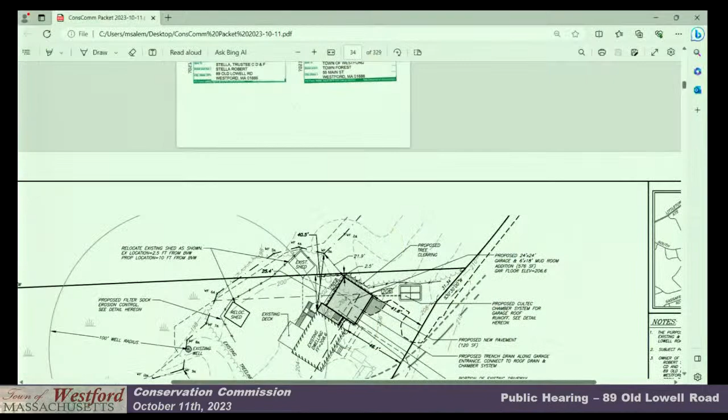The house currently does not have a garage. So what we are trying to do is put on a garage addition, I believe, on the south side of the house. You can see it on the plan there, and I'll kind of go up and point.

So this is the existing single-family house here. This is Old Lowell Road right here. Existing driveway paved coming in. There's kind of a crushed stone parking area in the back.

This property extends like 500 feet back from the road. It's a very long, narrow lot. The back 75% or so of the lot is all wetland and floodplain. We do show the bordering vegetated wetland here, and the floodplain line kind of follows right along that. So the 100-foot buffer pretty much takes up almost all of the property except for this very front corner right here.

We also have a shed right now that is actually just off the property, encroaching on the neighbor's property. So as part of that, we are going to move the shed from that property onto the subject property and meet the zoning setbacks. The way I've tried to do this is to kind of make it as net zero or as net benefit as possible.

So as I mentioned, there is a compacted stone parking area back there. We're going to take that out. We're taking out a little bit of the driveway to put the garage as well. So when you put in the garage, you take away some of that existing stone pavement area, you wind up with an increase of about 100 square feet of impervious, which I don't think is a lot.

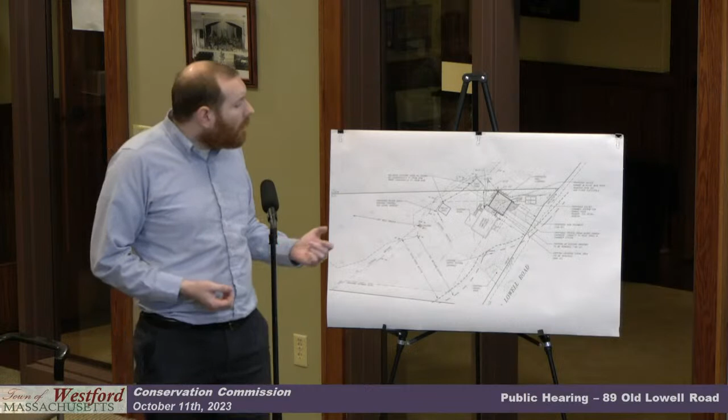But the other benefit that we're trying to do is to take this existing driveway and the addition and put that into a trench drain, into gutters, and put it into an underground recharge system. So not only are you barely increasing the impervious area, you're taking a lot of the impervious area that's already there and putting it into an infiltration system instead of having it run off into the wetland. So we've tried to make this as much of a net benefit as possible from a lot coverage point of view.

The corner of the proposed garage would be about 22 feet away from the bordering vegetated wetland. Currently, the house is about 40. The existing shed is about 3 feet away, and that crushed stone area that we're taking out is about 22 feet, so it's 22 feet for the crushed stone and 22 feet for the new garage. It's pretty similar.

So that's kind of the gist. We are going to take out, I think, about 250 square feet worth of trees for that garage addition as well. Happy to answer any questions, but that's the gist.

Jim, I have a question from Matt. Do you recall around Nab Lake how close we allowed the shed? There was a shed that had to be moved, remember? It was built too close to the lake. I think it was moved to 30 feet.

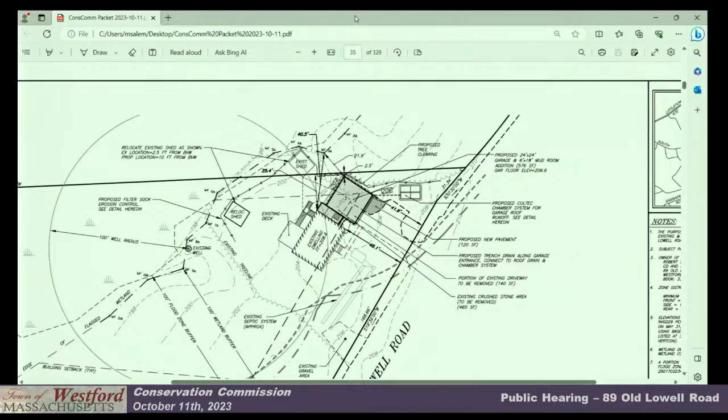Matt's pointing to it with his pointer. It's right here. I envision that they put that there to get it as far away from the wetland as possible. So if you were to build the garage here, you'd have to build the driveway over the septic system, possibly move the septic system depending on where the garage ends up. You might have to slide it further back, you might have to move the septic to get it to fit. So we didn't really want to disturb that whole septic system and all that over there.

How much can you shift it forward? Yeah, that's an idea, just how much can you bring it forward to pull it away from the wetland. It may not be exactly in line, but I'm trying to accommodate you here, seeing if you could just move it up somewhat.

The only issue is, the existing house right now is about 46 feet back from the front property line. The front setback in the zone is 50, so right now the house is technically pre-existing, non-conforming, less than what's allowed. We would be trying to get it to go to 41. So by putting that garage in, we're trying to strike a balance between getting it too close to the front property line and getting it too close to the wetland. That's kind of what we're trying to do.

But I guess what we're trying to tell you is, I don't know if we've allowed anything built in addition like this that close to the wetland. So I'm trying to find a way to keep it away from that, and you're saying you're trying to strike a balance. I don't know what to say, other than, I wouldn't be for this because it's too close.

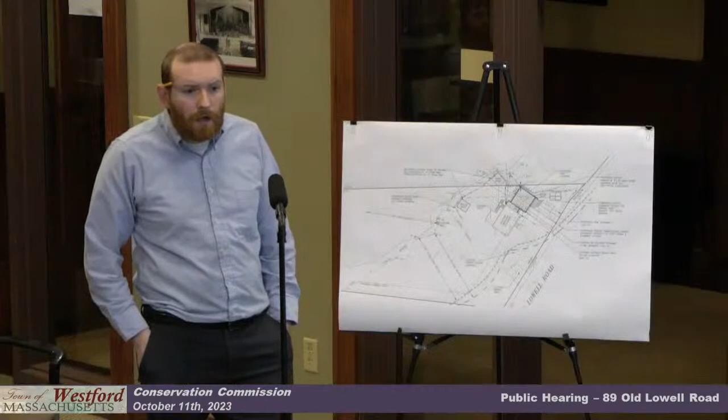So is the crushed stone that you're talking about removing, that's there in place today, is that pervious or impervious? I would consider that, everything is slightly pervious, but I would typically consider that closer to impervious than pervious. It's very well compacted, it supports the weight of a car. It's not asphalt though, we would consider it impervious. Okay.

The other thing I will say is, if cars are parking there currently - not a structure, agreed, but just for the sake of continuing the conversation, if cars are parked there, anything that leaks out of the cars is going right off. Typically we wouldn't allow a sonotube to be installed that close to the wetland, never mind a structure. So that's why we'd have to say no.

Do you know when the house was built? How old is this, roughly? 1984.

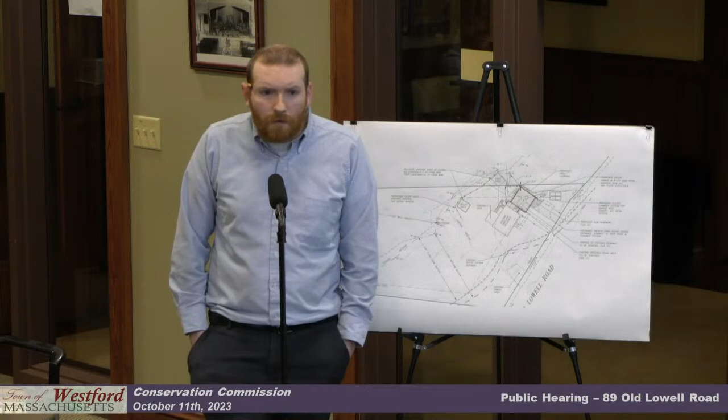I guess I'm looking for other alternatives. I'd ask what the rest of the commissioners think, and if you feel the same way, we can try going to the zoning board and try getting a little bit closer to the front with that garage, moving it closer to the front. You'd also need the zoning board to help with their side variance too, right? Instead of being 2 or 2.5 feet, that's gonna increase for them, which they'd prefer.

Yeah, because what we approve here becomes the standard for other projects, whether they have the same hardships or not. Others will be seeking the same relief.

So you're generally looking for 30 feet if possible, at least, the more the better. That's generally what we've approved, 30 feet - that's the no-disturb buffer. The no-structure is 55 for a house, in a previously disturbed area.

No, but let's see what we can do. I'm trying to understand and give them some direction. I'm not trying to say no. Just, well, with decks and things like that, that's where stuff as close as 30 feet has been allowed - decks or patios, things like that. But yes, this is definitely going to be different.

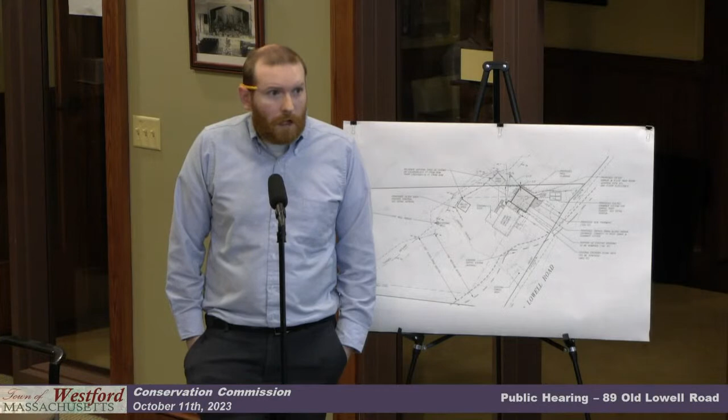I know where we've done that, where we've shrunken the garage to fit a lot and still get the setback. So I see this as being somewhat equivalent. And the same with the shed - from 10 feet, that should be 30 feet too. Yeah, we were trying to keep that away from the house. Obviously nobody wants a shed right up against the house, but I'll see if we could find a spot that's a little bit further away.

Also, with where you said there were trees that are being taken down for the construction of the garage - I'm trying to see where the 100-foot buffer is. Here's the 100-foot buffer. I want you to know one thing about tree clearing - I had trees hit my house. I'm not saying that, let me just tell you another thing.

If you could come up and introduce yourself, tell us who you are for the record, so that we can have your comments. My name is Robert Stella.

A lot of this wetland is also, and I went over this with Matt, because of the beavers - I've been able to walk in my backyard many times where you'd consider it wetland, I've walked back there 25, 30 feet without any problems. And then beavers have come along and it has definitely created wetlands. This here, I am so far back in the height and where it is, there isn't anything that's affecting the wetlands here. Absolutely, that garage is not affecting anything. It's high enough up, it's not affecting anything.

You know, I've been here a long time, and I feel that this is something that me and my wife really want. And I feel that trying to take this away for this type of reason, it's not fair to me.

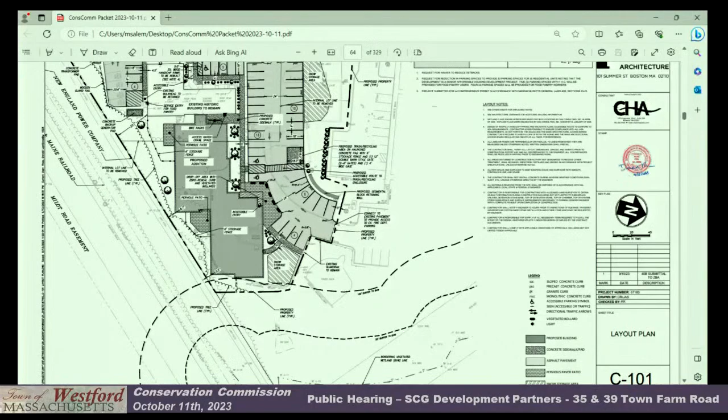Food pantry and affordable housing. So the proposal is a 35-unit mixed affordable development - sorry, it's not 100% affordable. It's 30 affordable units, 5 market rate units in an addition added to the existing town farm building. With that, we have parking associated with the food pantry workers on one side, the food pantry in the front, and then parking associated with the building.

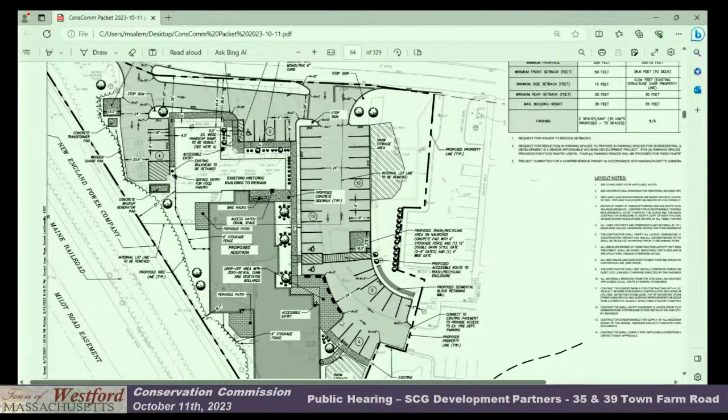We've added stormwater - there was very limited stormwater on the site in regards to catch basins. We've added catch basins, an underground recharge system, and we will be reusing the existing infiltration basin that is located within the buffer zone.

So just take a step back - all of this site had been impacted as part of the development of the Rogers Fire Station. In the existing conditions, here we've got the Rogers Fire Station, the existing town farm parcel, their burn building, and 2 municipal garages. As part of the construction of the fire station, the stormwater pond was located within the buffer zone, and parking area around the burn building was installed.

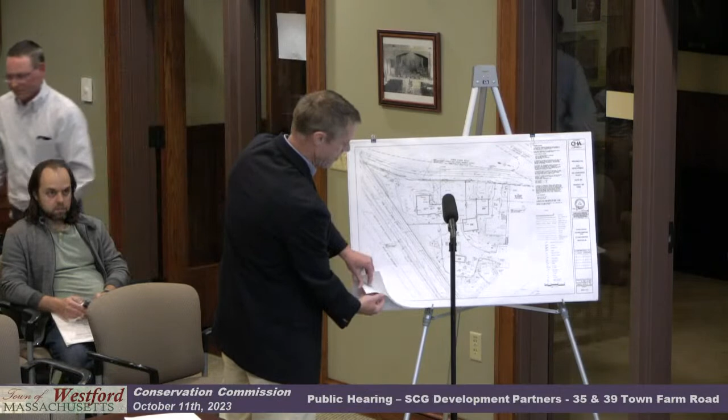So all of this infrastructure was increased as part of that original project. In our project, we're actually reducing the amount of impervious surface, and the wetland impact itself - the building is outside the 100-foot buffer. What we are doing is slightly grading within the buffer and maintaining the existing stormwater basin. Today, it's overgrown; they don't maintain it as well as they should. And the buffer itself is down here.

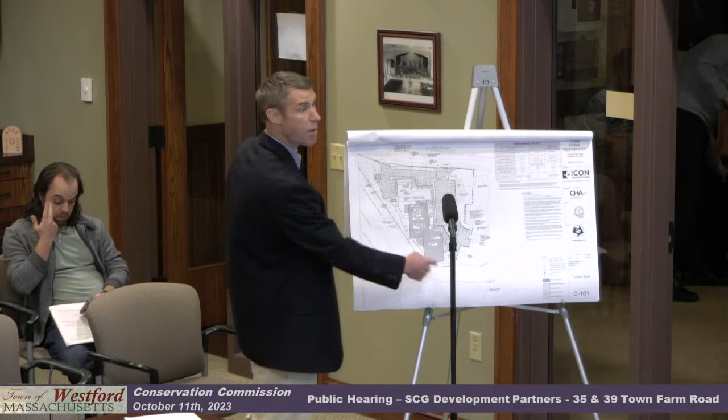So we clip it barely, even with our parcel. The parcel line is this dashed dark line. So it's a 40B project. It's going before the zoning board, and that's the project itself. Any questions? Far cry from when the school committee met there.

Any questions from members of the commission? It's a great project. My only question was related to the stormwater basin itself.

What's the maintenance? Sheet C003 describes the existing stormwater basin to be cleared of woody vegetation. Has there been any discussions about the long-term maintenance of that?

Yes, so as part of our requirements for stormwater in general, we have to meet Mass DEP's stormwater handbook. There will be a long-term O&M as part of this, and the details have to be worked out as to who owns it. But my belief is that it's going to be put onto the Town Farm residents' ownership to maintain that basin.

Okay. We have a description of how an infiltration basin should be maintained, and by now the vegetation is probably dying back pretty quickly, so it doesn't look as bad. But during the summer, you probably could not see the concrete wall that's in the middle of it.

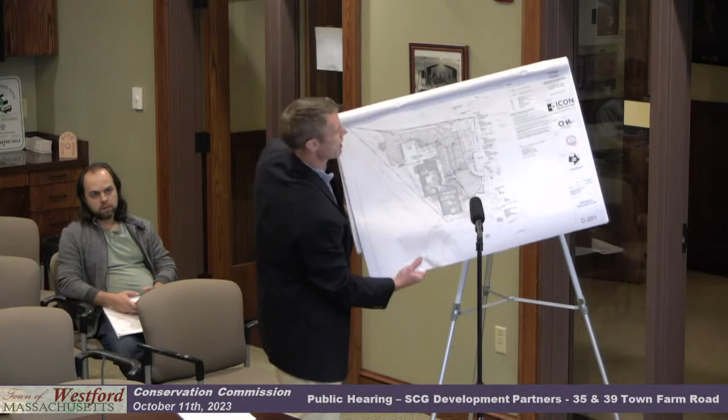Is the basin sized appropriately for your needs? Actually, like I said, we're reducing the amount of impervious surface that goes there today. In addition, we are collecting and putting an underground system under the parking lot, right here, and we're collecting and trying to infiltrate prior to going to that basin. So we're reducing the flow and volume to the basin.

And who manages that, the underground system? Yeah, that would be the ownership - still the association? Correct. Okay.

If the basin is not on the subject parcel, do we have other situations like that in town where the basin is actually on a parcel under different ownership? I think where they're going through the 40B process, correct me if I'm wrong, they're going to create reconfigured easements.

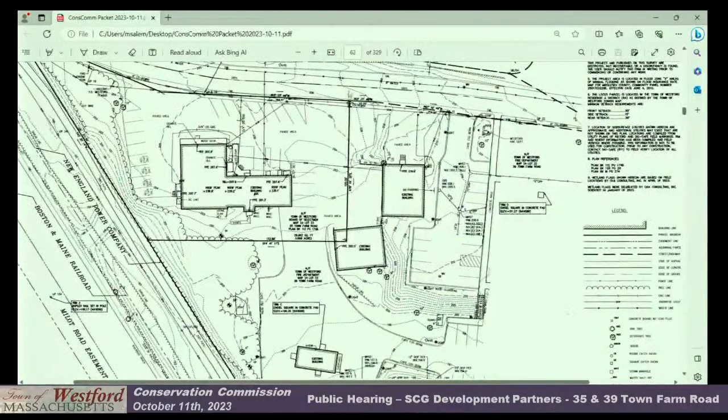Yeah, they're shifting the lot line - here's the existing. So the existing parcel is just that little square, or funny-shaped parcel right there. We have to reconfigure to make a 1.5 acre parcel. So during the process, we are creating a new lot and we're creating easements.

The Rogers Fire Station has a parking lot at the back of their building, and they have no other access than through the 35 Town Farm Road parcel. So there's going to be cross easements anyway - this was done through the RFP process, and all of these things are determined during the 40B comprehensive permit process. We create the lot, work with the town for the easements, and then everything gets written up so that legally the fire department will have rights and ownership. Yep, correct, that works.

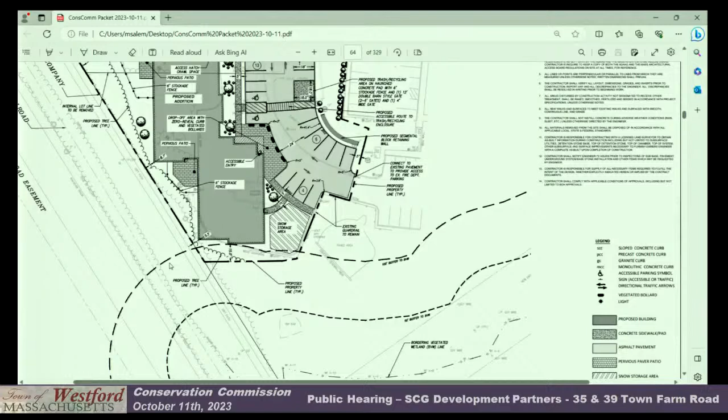Are there any trees coming down? There's not many trees there, mainly brush. I think there are two within that area. In this area in between, there are miscellaneous trees, and below that, right at the bottom where you clip the thing, there are two trees there, right? I think it's more vegetation - it's not really, it's shown as a tree line.

It says proposed tree line. So it's more of a brush line - if you walk there. There's a major tree in the back of the building. Correct, there is one very large tree in the back of the building.

Yes, that's coming down because our addition is going right there. But that's outside the buffer. Like I said, the only thing happening in this buffer zone really is grading and cutting back brush. And then the basin itself - can you put back one more tree?

We'd like to put them back, well, if it was in the buffer zone I would agree. I say this every time these projects come up - it is affordable housing, so every dollar is important, so we do try to conserve as much as possible. But if you're asking for a tree, I will pass it along to them.

We are planting additional trees though - let's ask for the tree and see whether we can sneak it in. We show proposed landscaping, so let them think about that. We've sort of taken an unwritten position that if you take one down, you put one up. But he is putting them up, several around the place. Okay, I stand corrected. Don't be sorry, I confused you, it's not hard to do.

And he's got snow storage. Yeah, I have snow storage, correct. Jim, could you walk us through the sanitary sewer flow from the buildings to the force main?

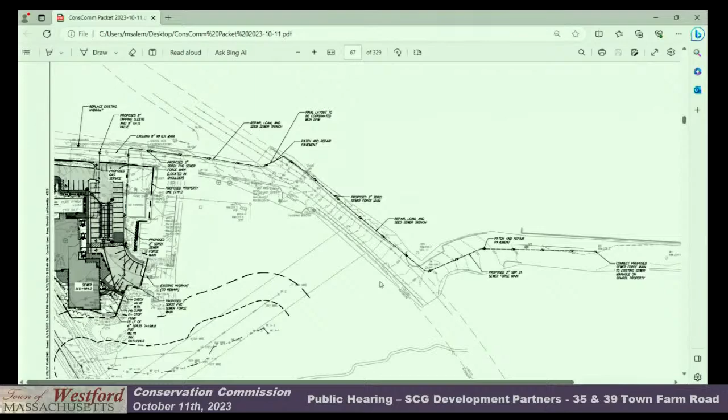So what happens is, during the RFP process, the town indicated that they have an existing Title V septic system that they know very little about. There's a record on the Rogers Fire Station plan of a cistern, an old type system. Because we're adding stormwater and setbacks to property lines, with very limited area, during the RFP process we proposed to pump to the Norman E. Day School, and that was actually something the town had suggested. We have to permit that through DEP itself, the connection.

So what happens is there's a pump station, it comes down to the bottom, and then force main up the street over to the... How does the flow work between all the buildings? There's going to be sewage output from the food pantry - right, there's a food pantry and community room as part of that building, and then the rest of the residences.

The plumber will have to get it to our system, and it will either run interior, which is what they've said, but we don't have final details on where, since in the preliminary stage of design, the site design is 90% but the MEP design is usually about 25%. So we know they have to accommodate our roof collection system, where we put the pump station, which is at the lowest part of the site.

Sorry, you got a lot of units going in there. It's gonna be awfully dry.

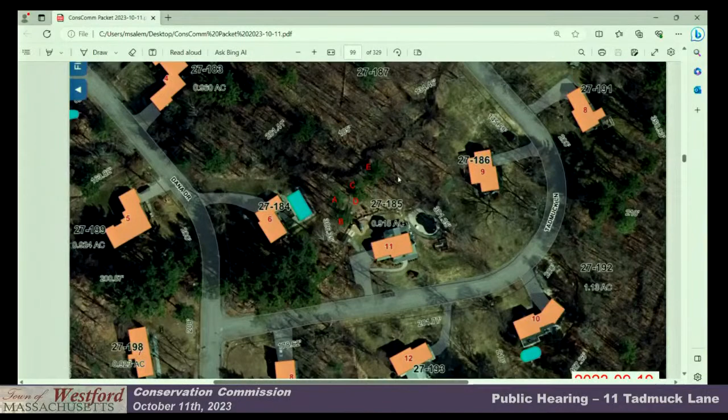These 5 trees are surrounded by plenty of other trees that are full and very strong in the area, but they tower 20 to 30 feet above the tree canopy, and all of the pine's growth and vegetation is above there, so it creates a significant sail.

They range from 106 to 117 feet tall, and they're within 60 to 80 feet of the bedrooms of the house. I will not lie that on major wind nights I stay awake and listen, because my house has a fire alarm, so that if I'm sleeping and a fire event happens I will get woken. A tree falling, I have nothing to inform me of.

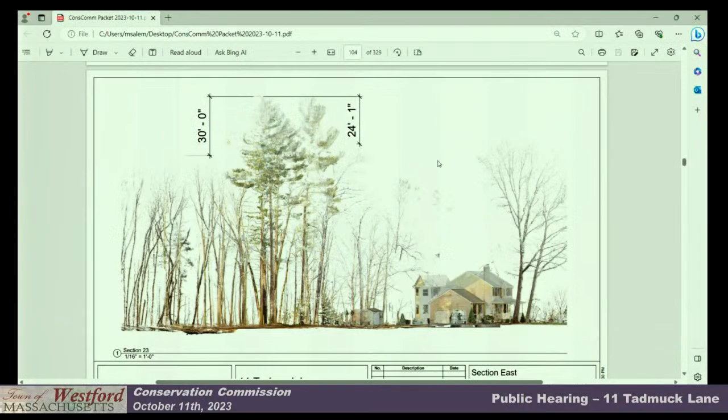So we are looking to have these removed by crane. There will be zero equipment inside of the buffer zone. The crane will be set up in my driveway and backyard, outside of the 100-foot buffer. The only impact will be the crew when they are making the final cut on each tree and walking through the space.

Any idea what the closest distances are to the house or to the wetlands? To the wetland resource area, it's not nearest, it's about 25 feet. I measured this, actually I think E is the closest, and that's probably about 10 feet. Photos were provided of these plans, I like the plans.

I provided some photos of the surrounding trees. So these are the existing conditions, the 5 pines certainly towering above the understory, which is probably hardwoods.

Let him do it, I'm just thinking we should have him plant something back in. Yeah, I had that same thought. The existing backyard is ringed by boulders with plantings on the far side of it. I think that was part of the order of conditions issued and closed out previously for the property. The trees are probably 30 feet into the woods.

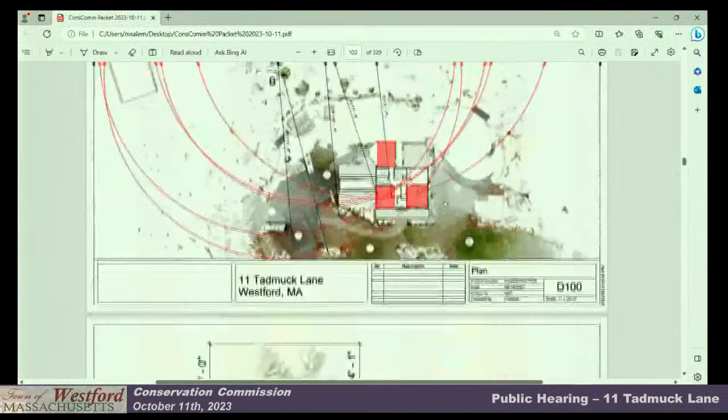No, we tend to leave at least 10 feet of it, closer to the property, and then the ones that are deeper in the woods would have a 20-foot trunk left standing. Okay, so you had your question.

Any other questions? There was a question about a maple, right? Yes, that was not on my original ask. When the arborist came out, he identified a maple that has a gaping hole in the front of it.

So it's got this big opening in the middle of it. This is not necessarily a threat to the home, but he did advise that one should be removed for safety because it's decaying and has that big opening in it. That's actually closer to my house than the rest of the pines, close to the play set or something.

Yeah, you can see it. It's poorly seen, it's here, hard to see with the lighting, but you can see the dark opening of where something previously broke off.

So did you have an arborist come look at these five pines? An arborist letter was provided, from Iron Tree Service. That's something else we like to see as well. Was that in our packet? No, I sent that after, today. So I haven't seen it yet, I missed it, it came this afternoon.

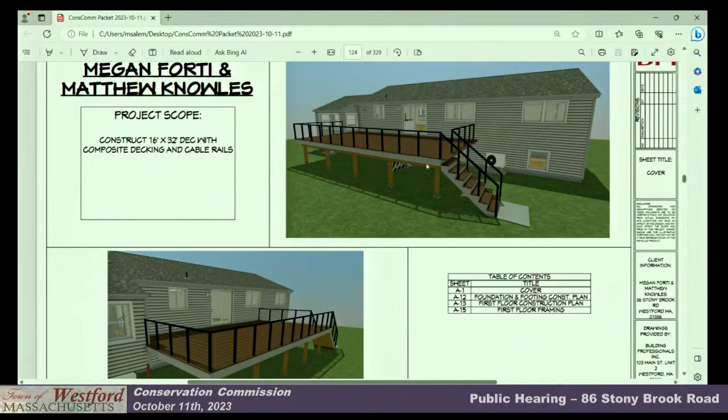So you can actually walk out of the basement underneath the deck? Yes, the plans are set that way. So the door still is functional, but you can't see it from this drawing. Yeah, it's kind of like in here. I think that's what's being shown.

But with the deck there, is the grass really going to grow, or are you going to? That's a good question. It might turn into dirt because obviously there's no sun. If I were to do anything to it, I'd probably put stone just to keep it from eroding. Yeah, that would be the thought as well, crushed stone so that the water can infiltrate, it'll still be pervious, but you won't have soil washing away. Right, exactly.

Matt, you see anything else with this? A regular determination, or a negative determination? The work is actually considered a minor activity under the Wetlands Protection Act, 310 CMR 10.02(2)(b)2.e. That's all.

Any comments or questions from the audience? Okay. Can I have a motion to issue a negative determination of applicability? So moved. Second. All those in favor? Aye. Can I have a motion to close the public hearing? So moved. Second. All those in favor? Aye. Thank you very much.

Moving on to our 7:40 PM agenda item, a public hearing for Madan, 6 Fletcher Lane. Under Massachusetts General Laws, Chapter 131, Section 40, the Wetlands Protection Act, and Westford's non-zoning wetlands bylaw, Chapter 171, the Westford Conservation Commission will hold a public hearing on Wednesday, October 11th, 2023, at 7:40 PM in Meeting Room 201 at Town Hall, 55 Main Street, to consider the notice of intent application of Anthony Badan for the replacement of existing walkways and patio and construction of an outdoor kitchen and spa within 100 feet of Nabnasset Lake bank and bordering land subject to flooding at 6 Fletcher Lane.

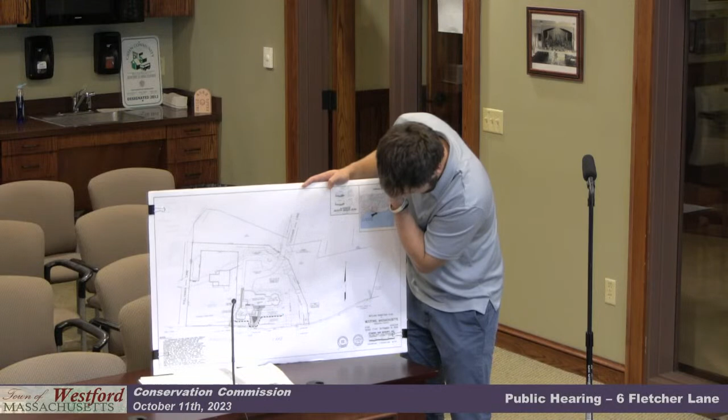If you do want us to beef up that silt fence, we can absolutely do that. My only concern is somebody with a bobcat going across the lawn, if the ground is wet and they churn it up and then it rains after that. But yeah, looking at the slopes there and thinking about where equipment will go, I'm just concerned about what happens when things go wrong.

And so the gazebo was within 30 feet of the edge of the pond. Do you know if the location of that structure was ever reviewed and approved by the Conservation Commission? I'm not sure, honestly. I know it's there, I'm not sure when the house was built. I'm not sure off the top of my head. 90s, yeah, in the 90s. Okay, I looked back at aerial imagery through the 90s on this lot, so certainly after the Wetlands Protection Act was adopted in '84, but I'm not 100% sure about the commission's setbacks.

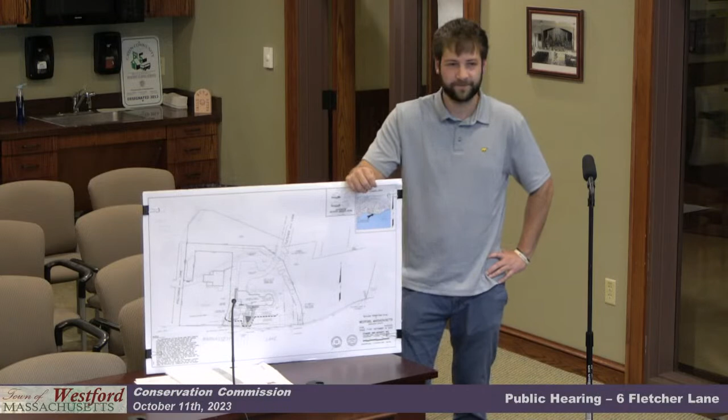That's one we can use, or we're always happy to use straw bales with a fence - whatever you guys prefer, we're happy to use either. I think the wattles and the silt fence, particularly with the work that's going to be going on, to contain velocity coming down a hill, I think the silt fence and wattle keyed in would be certainly preferred.

Any comments or questions from members of the audience? So this is a public hearing, an NOI - we would need to do orders of conditions.

I can draft them if we can get the plans reviewed and revised by the end of next week, and I can draft special conditions for the commission to consider at their October 25th meeting. So can I have a motion to continue to the October 25th meeting?

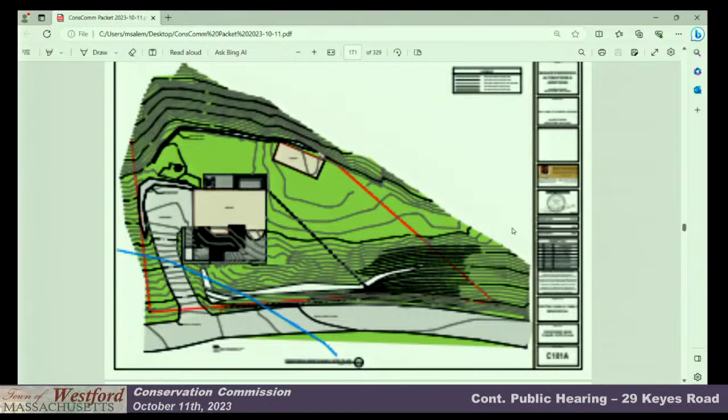So this is at completion of Phase 1. They've completely demobed, as it says in the schedule process. Everybody's off-site. This is the Phase 1 area of work, and this is 100% complete and done. And this is the lower existing stone retaining wall, still there in place, untouched, as part of Phase 1.

So any surface area where equipment was going over stuff during Phase 1—will that have been renaturalized? Okay.

We intend to literally complete phase one and stabilize it. It won't look like there's anything going on after that, until they come back to remobilize and address the lower wall. That's a picture of what that'll look like.

Were you intending to leave the erosion control from phase one in place between phases one and two? No, so you would remove the erosion control and then put it back at the start of phase two? Yes, sure, not knowing the time frame.

So you'd wait until areas that you had to renaturalize or reseed had grass started to grow, and then you'd take out the erosion control. Yeah, we won't remove the phase one erosion control until Matt inspects it and says the site's stable, and only then pull it out.

So the email from Friday at 12:23 just had three attachments.

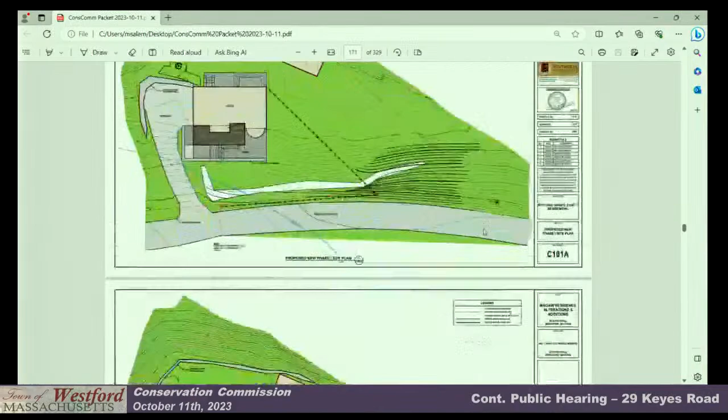So if you can please now go back down to one sheet again, to 101B. So now what this does is, where there is near vertical, we have another new near vertical with the same kind of slope down here. We have a level flat spot that doesn't exist now. We raise up again with another vertical, and then we have this upper area here that's recontoured.

The lower wall is a vertical 10-foot wall, which you don't have right now, it's not nearly a 10-foot vertical wall. On top of that, you've put another, I think an 8-foot vertical wall up closer to the home. So we're talking a vertical wall of 10 feet and 8 feet. And when you wrap around that corner, I believe when we asked the question, the height of that wall at that curve going to the driveway was more in the order of around 14 feet vertical.

Which is clearly not what is present today. So when you describe it as a replacement for what is there, it's certainly much more vertical and much more, I believe, impacting than what's there today. You mean from a physical standpoint, visual?

Well, no, because I have to look at the interest of the act. Right now I've got boulders on soil that things can live around and live within, but once I put this wall in place, things lose an opportunity to live there, and that's why instead of doing walls, if we were looking to find something with structure, and if the grade was such, I was looking at plantings because it provided habitat. So from an interest of the act standpoint, I was looking at that.

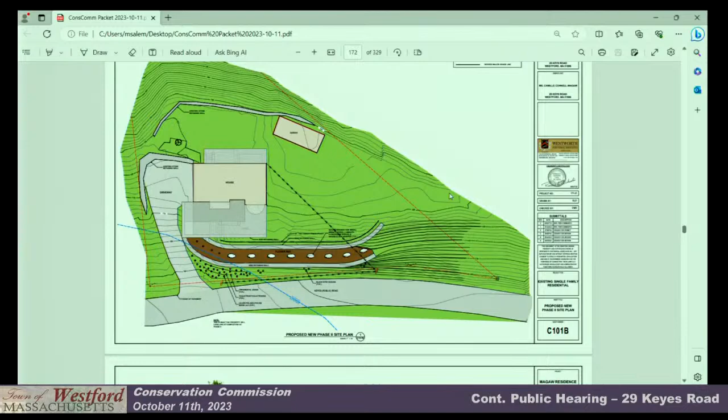I respect that you can have your own opinion and that there may be other options here, but I get it - this is the option the homeowners want to do. I totally understand. The question comes down to removing that small amount, less than 8 feet of wall, and replacing it here, opening up that buffer zone. Net, I don't see an impact to the resource areas. I don't.

It's that little slice—probably 3 to 4 feet at most from the 100-foot buffer to the curve of that lower wall. Yes, but you look at what's happened on that hill over the last 10 to 15 years when there are heavy rain events.

We are very sensitive to this. During construction and even outside construction season, we've seen significant erosion occur well outside our jurisdiction. So one of our concerns is whether the work outside our jurisdiction poses a risk to the nearby wetlands. Well, I think we've provided you a very solid plan on how erosion will be controlled during construction. To the extent we need jute matting or anything else to stabilize it once the work is done, we will do it.

We've put that in our plan. But, and you're right, there is erosion—my client said there's erosion coming through the wall today. What I'm telling you is that with a great erosion control plan in place at all times during construction, and stabilizing phase 1, there won't be an impact to the resource area during any construction periods. We've put together a very solid plan for erosion control.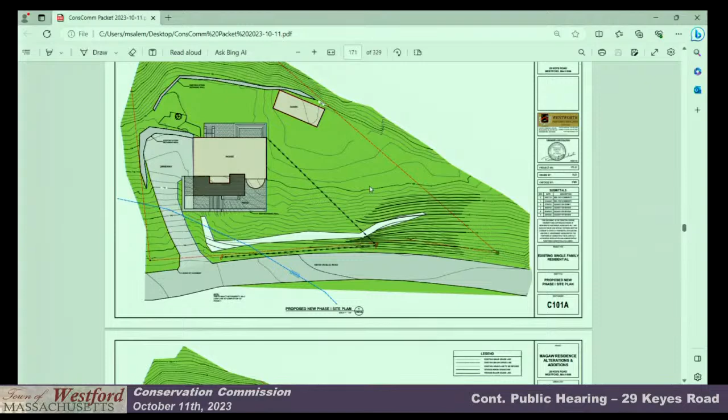I'd like to have it corrected for the record that that is not a 3-to-1 slope. I thought you were referring to the other stuff. I think Eric was asking about from the edge of the roadway up to the edge of that wall, the new wall being built in phase 1. No, I'll show you—from right here, all the way up there. I thought that slope was like 3-to-1, the whole thing.

Again, I don't want to keep talking in terms of 3-to-1s—I want to talk in actual elevation numbers. We go from contour 100, and when we get up to the upper area of the house, we're at contour 115, so it's a 15-foot elevation difference in a very short distance.

That's Mother Nature, you could say. That's 15 feet over what, 45? No, let's talk slope, you know? Yeah, adding 14 feet to the front—I don't have the actual physical dimension right here on me, but...

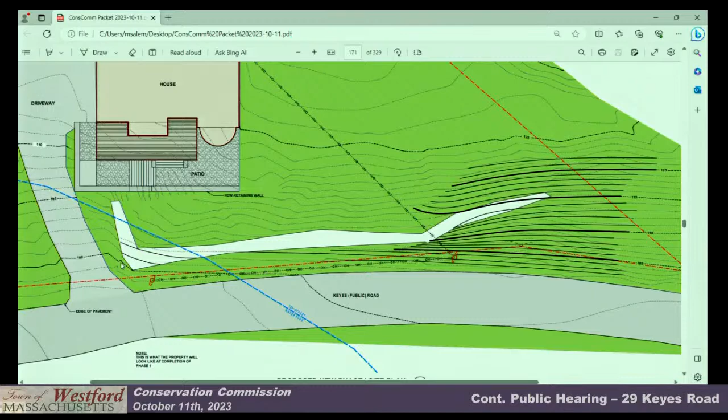It comes up vertical first, then it slopes up the rest of that steep section, from the 8 to the 15. No, I know it comes up and pops—I just wanted to know, when you graded that out, what was that grade? Was it 3-to-1 or what have you? You're telling me there's a 15-foot elevation change between one point and another, but I don't know what that distance is, so I can't figure out what the grade is.

It's about 35 feet, because we got a variance to put that porch on, since the existing house was 50 feet off the road. It's about 2.5 to 1. With a 14-foot deck, we're approximately 35 to 36 feet from the right-of-way edge.

Right here—no, the edge of the road, or wherever. Well, this is her property line, the red line. Okay, so these are the telephone poles and overhead wires. So that's a short distance.

That's 15 feet in elevation on 30 feet? Yes. Okay.

We're not comfortable with this wall, and neither is the homeowner. We hear all your concerns about everything with all these storms and the way things seem to keep changing and getting more impactful each time one of these storm events comes through, with erosion and everything. This I would not trust for more than the short period of time set up in the homeowner's schedule to get between phase 1 and phase 2. We're not okay with just leaving it as is. Then it needs to be modified one way or the other.

So these are the sections. Actually, if you could scroll down a little further, here we go, this section. This is kind of the stacked condition, so this is all very free draining and allows water to get down. It can come through joints and through the blocks, because as you can see, the blocks are actually hollow inside, just concrete around the perimeter. It allows for that water to be taken care of without it just shooting down the steep slope and across the street into the neighbor's property and into the wetland, which we're trying to protect.

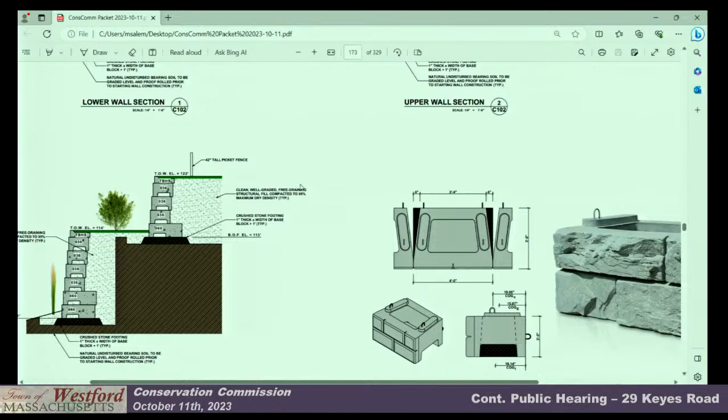So in the image on the lower left-hand corner of the screen, where you've got the wall, then you've got the crushed stone behind it, and then you've got soil, is there any kind of barrier between the soil and the crushed stone? Yeah, okay. There's a planting layer here on top. I meant a vertical barrier. This is natural earth.

I think, like she's saying, between the natural soil and the fill that's going with stone, do you put any kind of barrier, or do you just trench and is there anything to keep that natural dirt from migrating gradually into the crushed stone? Because this is where, again, I'm thinking long-term. If water is infiltrating through the crushed stone behind the upper wall and gets down into that dirt, is there anything that's going to prevent a lateral migration of the dirt underneath the upper wall into the crushed stone behind the lower wall?

No, like a Mirafi paper or some sort of geotextile? Yeah, the lower wall and its gravity retaining value back against the earth. Okay, so even if the dirt migrates into that lower area of crushed stone, the wall is strong enough to hold it. Yes, and it won't - I mean, the pressures will stabilize. You're talking about small amounts of soil washing through from subsurface water movement that might filter into the stone and work its way down. Yeah, sure, it's small incremental amounts. Okay, so it stays contained in this area. So the water can work its way through and out, but soil would not. Yeah, correct.

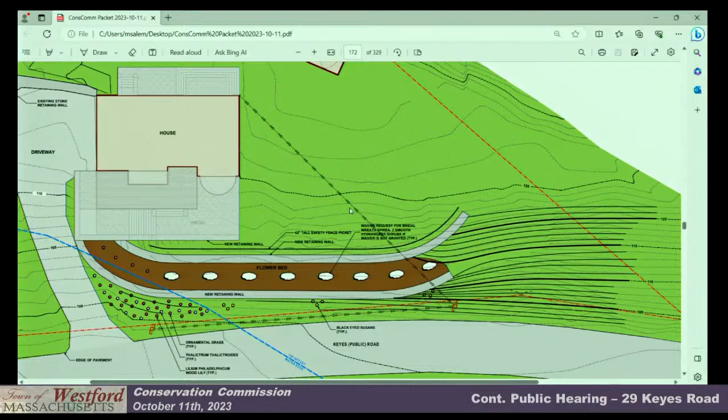The waiver requested for bridal wreath, that is listed on the invasive plant atlas of the United States, and I'd rather not see that on there. It's pretty invasive, and even though it's outside of the buffer, there's a chance of it seeding. So it would be the two smooth hydrangeas then, if that waiver request is denied. The purpose of asking for the waiver is that the bridal wreath provides a nice view in front of the wall, so you don't see that 7-foot wall.

It's a nice tall shrub that grows about 5 feet, and it's white, but it requires very little, very low maintenance. With the hydrangeas or a lot of the other shrubs, it would require cutting or special fertilizing and that type of thing, which would require us to climb up 10 feet to take care of that wall, or drop down 7 feet. There are native plants that do the same thing, like sweet pepper bush, which is a similar type of bush.

There's native alternatives - if there are plants that have been identified as invasive, we certainly don't want to be promoting their planting.

Maybe you can look into that. We don't need an answer tonight. Let's just find something, a different plant than that, something that's not invasive. Just an alternative.

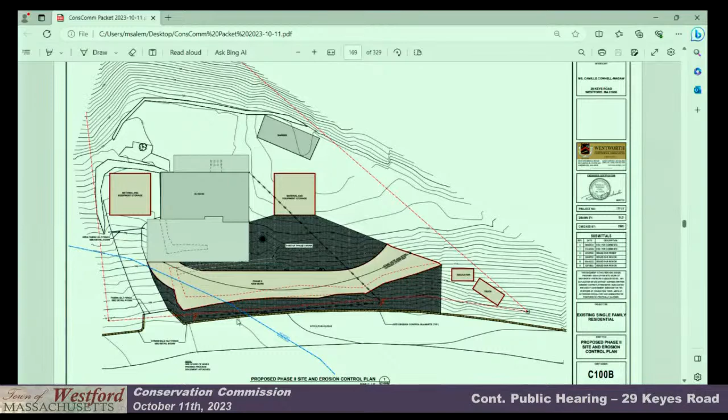I passed it. We've been working on this for a number of years with the zoning board, and my client has been here prior to mine. I got to take responsibility for the fact that this document, which we spent hours on, somehow was not attached. But I can assure you, this is about as much detail as I could ever come up with. If the board wouldn't mind, I'd really like to just run through that part of it, because to push this off any further is really becoming a hardship for my client.

So phase 2, which is the removal of the boulder wall along Keyes Road, replacing the said boulder walls with engineered concrete block wall, which is what this plan here represents. So first, we would implement all work prescribed on drawing sheet C100, if you could go to drawing sheet C100, prior to any excavation.

This is the erosion control. It's actually the very first sheet, C00, there we go. So we're going to put in all of our erosion controls, to be installed, inspected, and approved by Westford Conservation Commission prior to any work.

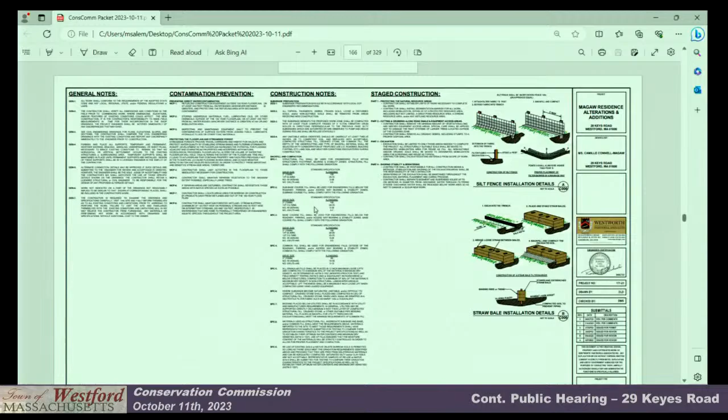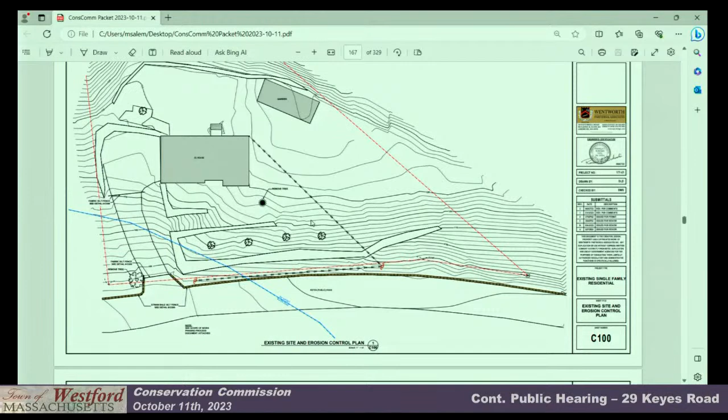Section 2, any required pre-construction meeting will be held, and this is when we'll bring the contractors on site, go through the order of conditions, go through the work process, and the town will be there to sign off. So now we actually start work.

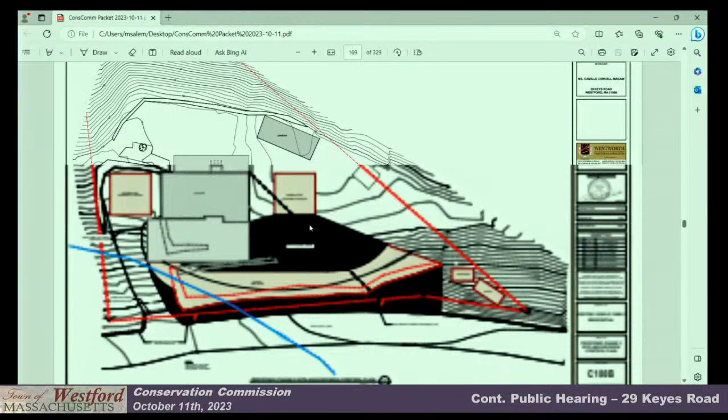Once the first 36-foot section of the lower block wall, starting with the lower block wall first, we will work in 36-foot sections. The boulders will be removed and placed directly into dump trucks to be removed immediately from the site. As small soil and small stones are exposed, it will be relocated either off the site or to the pre-designated material storage location in front of the garage doors, and that's what we've identified there.

That area will, in fact, we called for putting down a mat, putting the soil on the mat, erosion control around it, and then covering the soil when it's exposed. We have two setups of siltation fence here, so we have double siltation and the straw hay bales all along the property.

When work is stopped for the day, the soil pile will be covered and surrounded by erosion control as designated by the commission. Once the boulder wall is removed and the area of the new block wall is fully excavated and trenched, they'll put in their footing or stone base for the wall.

Then the crushed stone footing base and the segmented precast blocks will be installed as shown on plans C101B and C102. At all times, erosion controls will be inspected and repaired as necessary.

Installation of the upper block wall will then commence so that it can be completed in the same 36-foot sections. Once the block wall is completed, it will be backfilled.

This is the upper lower wall, phase 2, C102. We'll use that material stored in the driveway to backfill that first wall. If additional fill is required, it will be brought in from off-site by truck and put right in place.

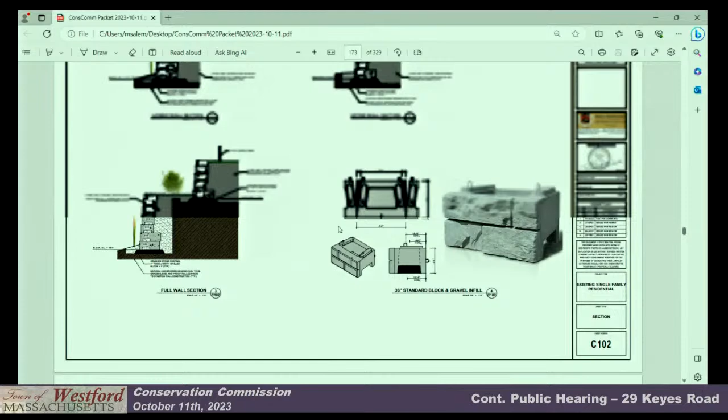So there's no need to store that material - it'll just be dropped behind the wall. At that point, that upper lower wall, the first one, the 7-foot wall as we've been referring to it, will be backfilled. Once it's backfilled and compacted, we can start to put vegetation on top to stabilize things, or jute mats, depending on the growing season.

Throughout the wall construction, required engineering reviews, inspections, and certification of the work and process reports will be completed in a timely manner as required by the order conditions.

Once approved, the final grading and landscaping, including loaming, seeding, and planting, can be done as needed. Slope stabilization methods will be employed as necessary, including jute matting.

So the plan is to pull out the upper lower wall first, dig behind the stone wall, get all that material off-site, put in the stone base, and then they'll start building that wall. They'll build the entire wall, backfill the back of it, and stabilize it before they touch the front wall.

So you're starting on the eastern, or southerly, right-hand end, working in 36-foot sections? Right here, working from this east wall to the west. See this space right here? We're going to excavate behind this existing wall.

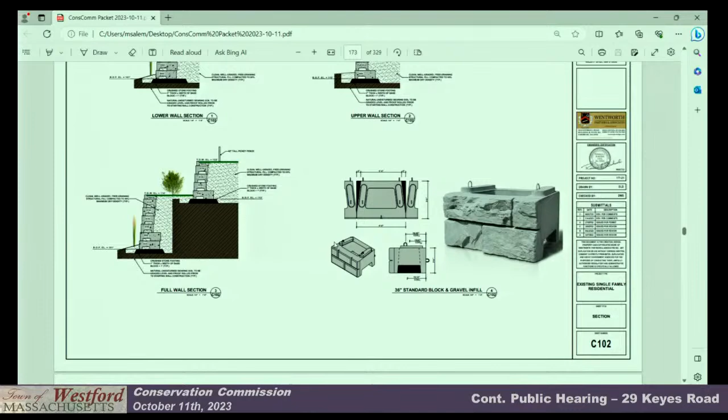In 36-foot, I thought we said sections. Is there a typo there? Yeah, it's 36. No, I misread it. It says 36-foot sections. So, and then you'll go up to here and dig this back, and then build this section for 36 feet, and then come back down and continue, and do the two back and forth.

But otherwise, the entire length is going to be open without boulders when you start to build the wall? Right. Because if you go back up, Matt, please, right here.

So the problem is how to access this, to do it. This drawing doesn't show it, but it's okay, our previous ones do. We've got the protection that we've put in all along here to not let anything go into the wetland. We're trying to stay behind that protection and not disturb it, and let it be there to catch anything.

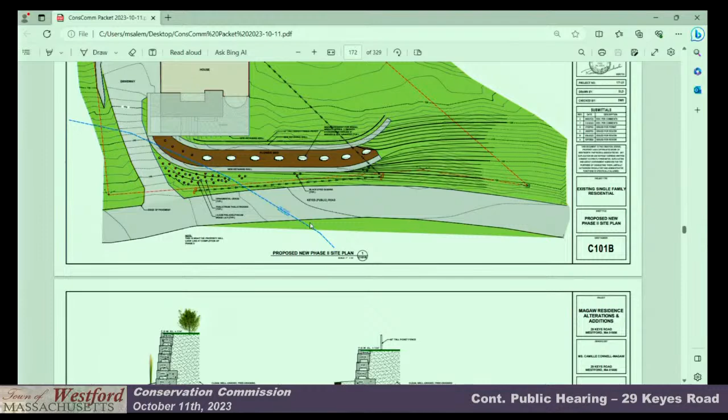So we got to either come up and in this way, which is hard to do from that end because there's just not enough room for them to work with the equipment. So we'll come in from the other end and work our way in, and then start placing the blocks and building the wall back out, and then come up and build the upper one, and then come back and build this one, build that one, and finish the rest off in reverse. So that's the only real option we have with the existing site conditions and the protection measures put in place that we don't want to disturb, to protect the wetland.

So, okay, so you're going to take out the entire existing boulder wall. And is there an estimate for how long that will take to remove it? Yep, it's in there.

Okay, let's see. Subject to cooperating weather, the completion of Phase 2 should be accomplished within a six-week span. Okay, specifically, the removal of the existing boulder wall should be completed within 1 week's time. Within a week, so it should take about 3 days.

The final excavation for the footing and installation of the footings — I didn't mean poured footings, but they're going to scrape that and put stone as a footing. It's right here. That'll just take a day or two at the most to get that all ready. And then the installation of the upper block wall is estimated at 4 to 5 days.

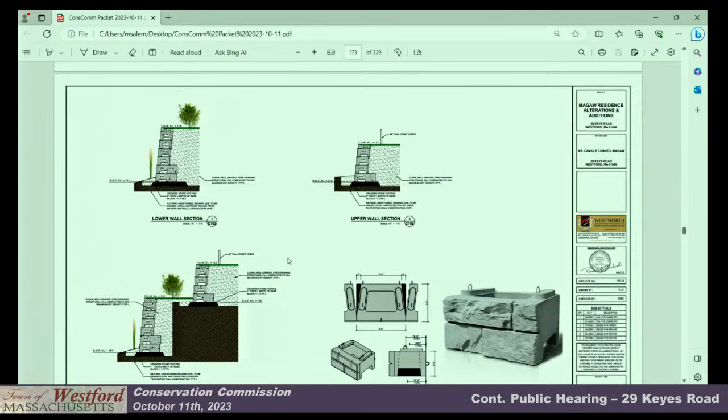But how does jute matting keep the backfill from migrating, if there's a rain event, what's going to keep the material from migrating laterally? Okay, right, so if we can go back to that other plan. So now we've dug this whole area out. It's from this point up to here that we were saying we'll slope it, and that would be jute matted along this whole upper area.

But if you're doing the first 36 feet, what is at the right-hand side of that 36 feet to keep what you've just put in there from going sideways? Because you remove the boulders on the upper and this lower is an empty trench, sloped, it's a cut slope side with jute matting on it. So there'll be jute matting, but if you've put in the front wall, you put the rocks behind it, and you put fill behind that, if there's a heavy rain, what happens to the fill that you've just put behind? You've got this wall that you've put in, you put rocks behind it, you put dirt behind it, but this end is still open at the end of the 36 feet.

What is securing that end of the section that you're working on? Okay, I think I've tried to represent it with the material and the jute matting. So here's the front wall. We've excavated this out, we put down this stone, and then here's your front wall, okay? Meanwhile, the back wall, which goes up here, right?

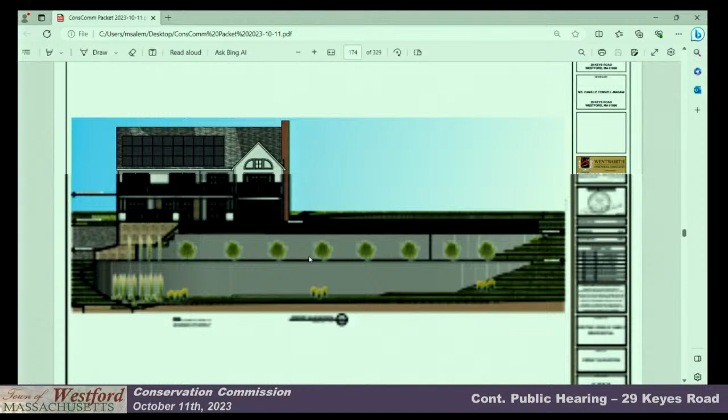The next row will be 4, and the next row will be 3. And then you'll have everything else scraped and cut back and jute matted, and that's how it'll be.

There is the possibility that some material could end up down in the trench, and when they show up the next day, they'll have to clean that back out of the trench. It won't be a hard vertical edge. No, it will not.

Is there a reason you have to remove the jute matting? The jute matting holds the slope - I don't know if it biodegrades in place or not. We could backfill it in there. The other walls I've seen installed with the structural engineer's plan, some of them have geogrids, but these don't need geogrids in this particular instance.

We just don't leave the material in there because it's going to all be filled with the stone and the backfill. I was just thinking long term what the jute mat buried in the ground does. Well, thinking about it, if you're using it to stabilize the slope while putting in the wall, if you left it there without adverse consequences, that's just something else preventing the soil from migrating forward towards the wall. If the jute mat is acceptable to be left in the ground, we have no problem, because it's jute, it would degrade over time, you would think.

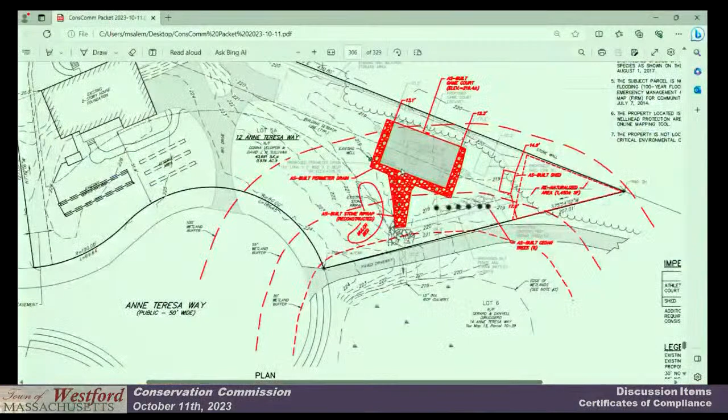The as-built plan was provided. The impervious area calculations are consistent with what was proposed. The shed is located in a different location.

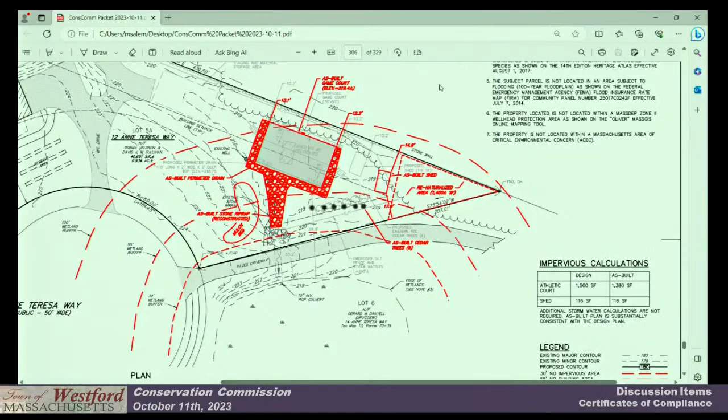It's a little bit closer to the wetland resource area, but it is still outside the 50-foot wetland buffer with which the commission would require for a structure. The stone and perimeter drain around the stone is oversized and larger than proposed. The original request was submitted back in the beginning of May this year, but at that time the area in front of the shed was stable, just no growth was observed. After my site visit this past week, the erosion of the lawn area has grown in, and the erosion controls were removed after this photo was taken because the growth was in. I would recommend the commission issue a certificate of compliance for substantial conformance with the approved plans.

I have a motion to issue a certificate of compliance for DEP file number 334-1778. So moved. Second. All those in favor? Aye.

The second certificate of compliance was for a project that was before the commission last year. The proponents were seeking to create a little more usable area to the rear of their house. There was an existing boulder riprap wall. They also sought permission for an open air pavilion and an outdoor kitchen.

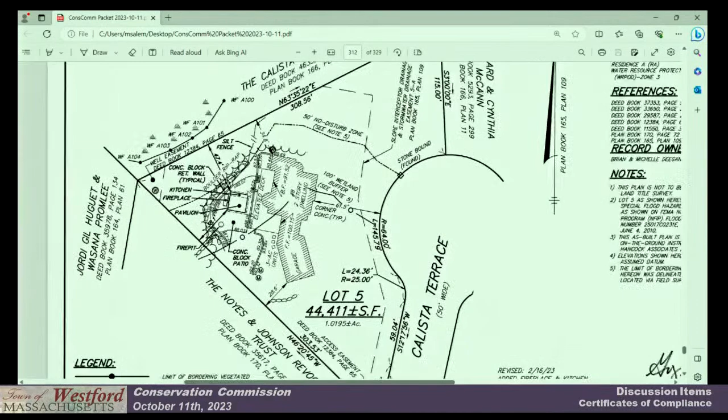The pavers that were installed were of the pervious persuasion and were installed as such. One deviation noted by the project engineer was that the approved site plan had approximately 1,230 square feet of pervious patio surface. The as-built condition has 1,390. The expansion is outside of the 50-foot local no-disturb buffer, and is consistent with something I think the commission would have approved originally. As such, I think the site is in substantial conformance with the approved plans and would recommend issuing the certificate of compliance as such.